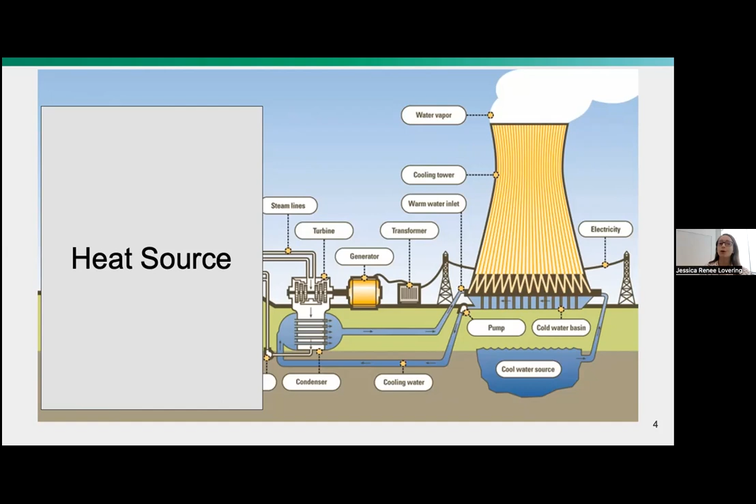Okay, so at the very basic level, nuclear is just another way to boil water. I've put this schematic of a power plant up, and everything you see on the right side could be any sort of thermal power plant. That's what a coal plant looks like. That's what a gas combustion plant looks like. It's also what a nuclear power plant looks like. The only thing that's different is what's on the left, that heat source. That could be your coal boiler or your gas turbine, but for nuclear, it's where the nuclear reactor goes.

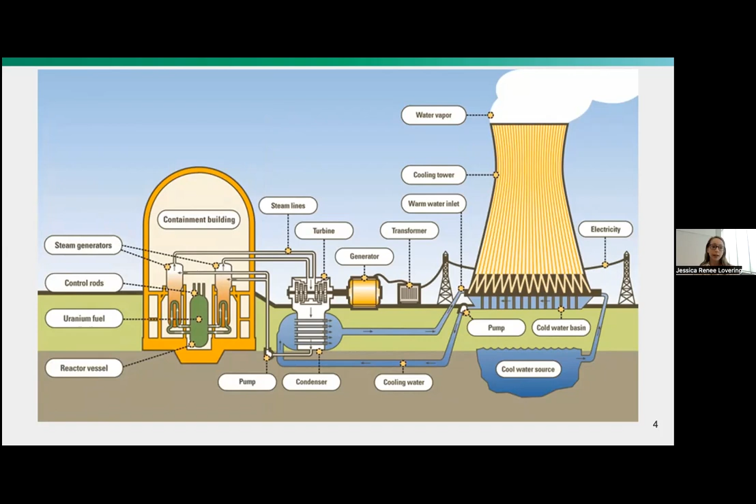And we say colloquially that a nuclear power plant burns uranium for fuel. But that is just a layman's term for what's happening in there. In reality, nuclear fuels, which are usually uranium, don't burn, because what we mean by burn is technically combustion, a chemical reaction where you're breaking molecular bonds. What's happening in a nuclear reaction is fission, which is where the atom splits apart and releases a bunch of energy.

I'm not going to go into the details of that, but the big things why it matters and why it's important that we're not doing combustion is that when you break apart that atom and release all that energy, you have zero emissions, so no CO2, no water vapor coming out like you do with combustion, and you also have extreme fuel density. And so I like this little comic from XKCD that's showing the fuel density of different fuels.

So sugar, coal, fat, gasoline, they're all around in the tens of megajoules per kilogram. And uranium is about 76 million. So many orders of magnitude more dense. And the reason for that is that it's a completely different process for how you're getting energy out of the fuel.

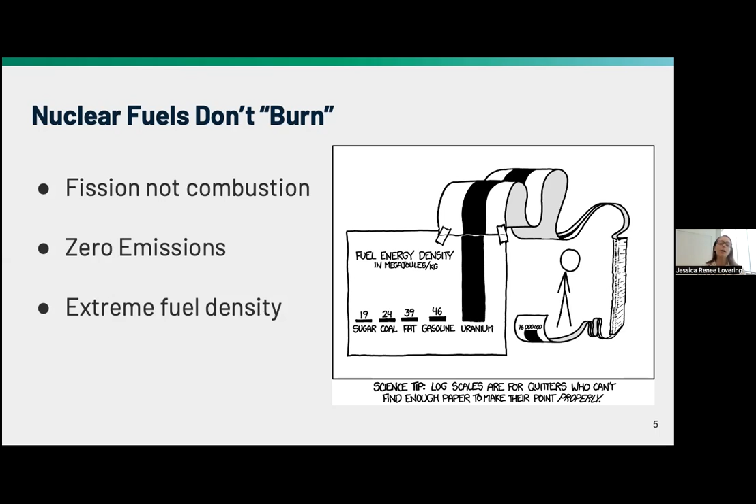And that kind of gives us a little background of why nuclear is so different, even though in the power sector, we think of nuclear, it operates much like any kind of thermal power plant, but it is very different from an environmental perspective.

So one slide on traditional nuclear. The nuclear that operates around the world today, for the most part, generating 20% of electricity in the US, 10% of electricity globally, is what we call light water reactors. And light water is just the scientific name for normal water. About 85% of the reactors around the world today, there's about 500 operating nuclear reactors around the world, are light water reactors. So that's kind of the standard normal.

They're very big, usually over 1,000 megawatts, so over a gigawatt. Most of them are what we call pressurized water reactors, but there's also a set that's boiling water reactors. I'm not going to go into that. The other 15% is what are called heavy water reactors. That's what Canada's entire fleet is, a heavy water reactor, and most of India also uses heavy water. I am not going to go into heavy water at all, but if you're interested, let me know.

The big companies that you've probably heard of, like Westinghouse, General Electric, Areva, Toshiba, Hitachi, Mitsubishi, and even Rosatom in Russia, they all do light water reactors.

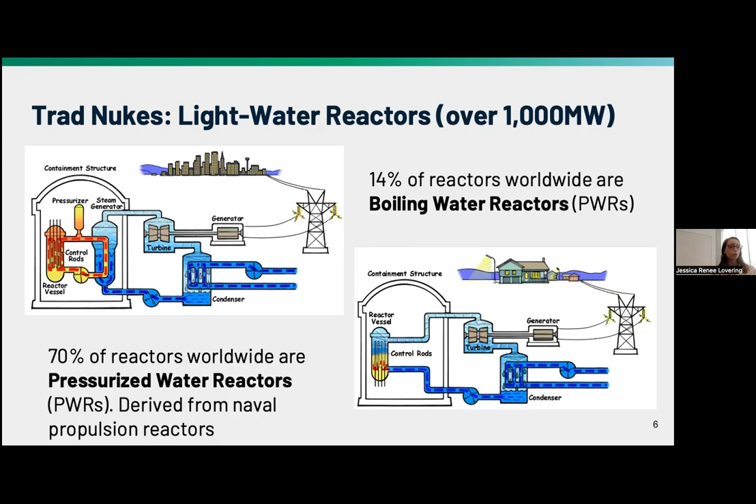There was an oil crisis, and a lot of countries at the time did use oil for electricity generation. So they built out big nuclear fleets to get off oil, and to supply electricity for growing populations. We still had the baby boom in US and Europe, and also heavy industrialization, not just in US and Europe, but also around the world, particularly in East Asia and South Asia.

And then in places like the US, we had more growing concern around air pollution. The Clean Air Act did incentivize some nuclear, more so in Europe than in the US. But those were the main drivers. And nuclear at the time was really seen as sort of the future of electricity production.

Today, some of the drivers are different and some of them are the same. So I think climate change is a much bigger motivator, particularly for young people working in nuclear and working at environmental think tanks and organizations. It's also what's caused a bit of a shift in perceptions of nuclear for environmentally concerned folks.

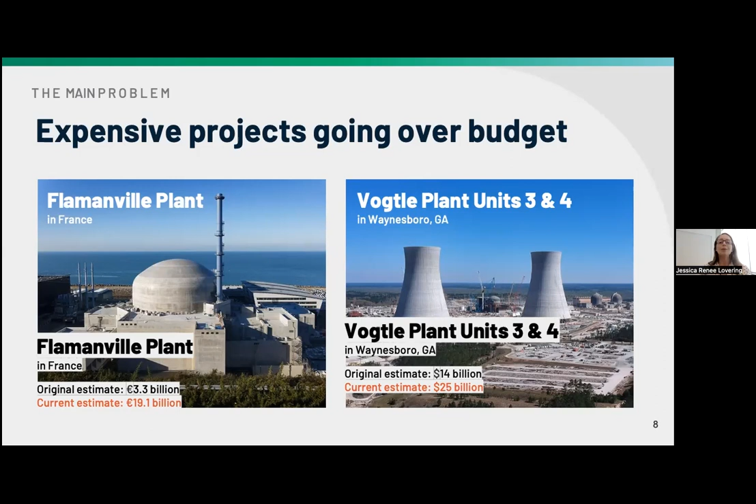I will give this one caveat that even with these huge cost overruns, the electricity coming out of these plants will still be pretty cheap because they're huge. They generate a ton of electricity over 80 to 100 years. But for modern market systems, financing these projects is really tough, and it can bankrupt a utility, especially if it's on the smaller side. So if there is a future for nuclear, it needs to come down in cost. I'm going to talk about how we might make that happen.

But I did want to touch on how cost has become more of an issue, in that the market has also changed. So back when we built out these big fleets of nuclear in the 70s and 80s, mostly we were looking at vertically integrated utilities, often state-owned utilities in Europe and in East Asia. You had huge demand growth, so utilities could justify those investments to their shareholders, in terms of they would get a return on their investment. And oil and gas were pretty expensive, particularly during the oil crisis in the 1970s. We didn't yet have hydraulic fracturing in the US, so natural gas or fossil gas was also quite expensive at the time.

And now, some of these are different, some of these are more so. So now, for the most part in North America and Europe, there's deregulated and liberalized utilities. A lot of emerging economies are also deregulating their utilities. That makes it harder to do big capital intensive projects. But on the flip side, there's a lot more incentives for zero carbon energy now, and you see this in a lot of different forms. But as a counter to nuclear, in the US at least, we have very cheap fossil gas and cheap renewables, which is a good thing, but it's really shifted the attractiveness of nuclear in some cases.

But on the plus side for nuclear, we do have a need for low carbon heat for industry and hydrogen production, and nuclear can provide that. It's one of the only ways you can do it in a low carbon way. So that's a potential new market for nuclear. So this is kind of why there's renewed interest in nuclear, but why it needs to look very different, have different business models, and be much cheaper.

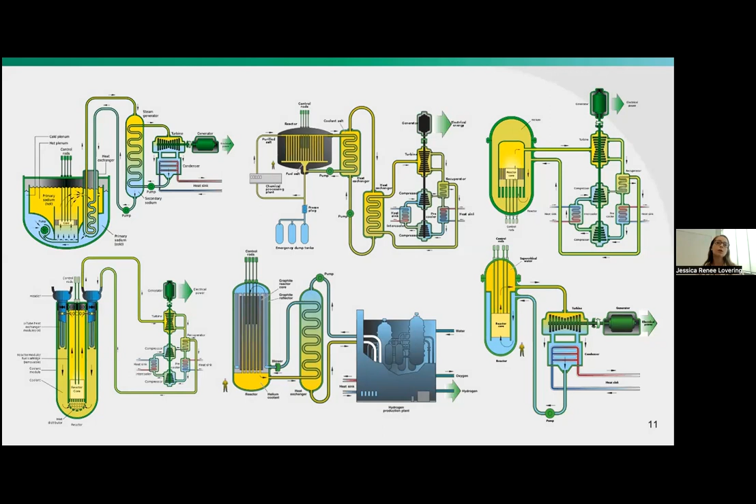And the other big thing that's changed is material science. So we can do a lot of things with materials that we couldn't do back then that make some of these technologies easier. So I'm going to dive into a little bit of what's happening with advanced nuclear today, what the new projects look like, and what the ongoing challenges are. I show this picture, but we're not going to go through all of these. These are kind of the big 6 of advanced nuclear, and I'm not going to go into the technical details. If you want to look up Gen 4 nuclear, these are the 6 Gen 4 nuclear technologies. What I'm going to focus on is what are some of the benefits or attributes of advanced nuclear broadly that make people interested in them.

So big categories. We have small modular reactors. Just a question, who has heard that term before? Okay, so they are what they sound like. For the most part, and this definition really changes depending on who you talk to, they are small, so under 300 megawatts electric. So just to remind you, traditional nuclear that we operate today is usually 1,000 megawatts or higher. Small modular is defined as under 300 megawatts electric, so much smaller.

And then usually it's light water reactor technology. So kind of familiar technology, just scaled down. And then the big thing is modular. So that can be the whole thing is factory fabricated, or major components are factory fabricated and assembled on the site. Depends on the size and the technology.

There's also microreactors, which was a big focus of my doctoral research. Those are defined as anything less than 10 megawatts. So that's really small. They usually are about the size of a shipping container. So just to get your head wrapped around that, they have a lot of other features that I won't go into too much. The one thing that I think is really important is they have lifetime cores. And what that means is they don't do any refueling on site.

So if you were to purchase a microreactor, it would come to you fully fueled and sealed. You would run it for 10 to 30 years. And then when it's spent, you ship the whole thing back and it gets refueled at a central facility. So it's very different than how traditional nuclear operates, which is refueled about every 2 years. And it's a huge process. You shut down the whole plant for a month to do the refueling.

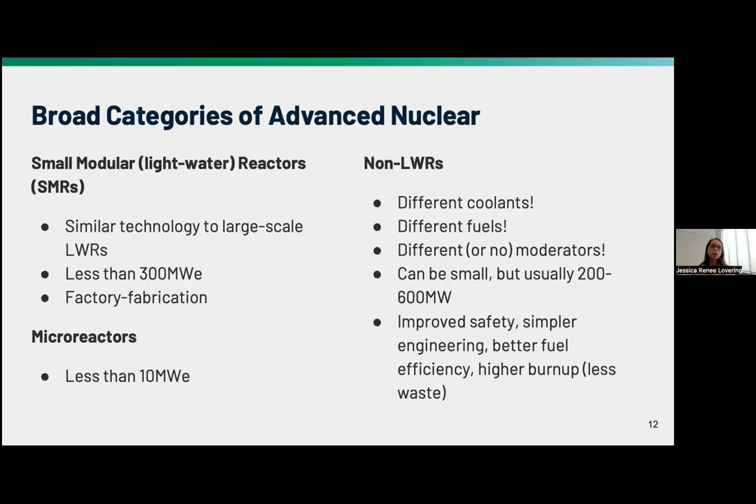They can be small, so you can have a small modular reactor or a microreactor that's not a light water reactor. I'll show you some examples of that. But they don't have to be. So a lot of these designs are in the 200 to 600 megawatts, so more like a gas turbine size. Broadly, all of these non-light water reactors are aiming to solve problems from traditional nuclear, mainly economic problems. So they have improved safety, simpler engineering, that's a big one, better fuel efficiency and higher burnup, which means you have less spent fuel left over at the end. They use up more of that nuclear fuel.

So that's a lot, and there's a lot of different technologies. I'm going to go into a couple of them that I think are farthest along, most interesting. But the one big feature that almost all of these non-light water reactors and almost all advanced nuclear has that's really important is what we call passive safety or intrinsic safety. And what that means, if you're not an engineer, is that the safety is based on physics and physical properties rather than engineered systems. One example of that most people can grasp is a lot of these rely on convective cooling rather than forced cooling with pumps.

And so it's kind of like your pot of hot water on the stove. The hot water rises, and as it cools, it falls back down. So you don't have to have pumps at the bottom pushing that water through constantly. So if something goes wrong with the reactor, the power turns off, it will cool down naturally over time. And you don't have to have all these redundant electrical systems to keep those pumps running in the case of some sort of accident.

The other big one is that most of them use fuels that can't melt. They're either liquid, which is already melted, or they are ceramics based, which means they could melt, but it would sort of need to get to the core of the sun temperature, which is not really feasible in any of these reactor designs. So that's also promising.

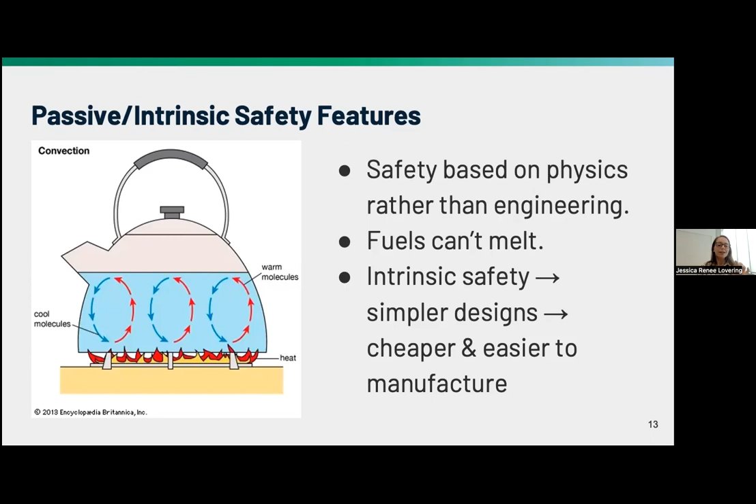And that cheaper and easier to manufacture is key, because that's really the big paradigm shift that's going on with nuclear technologies right now, is a shift from building nuclear as a large infrastructure project, like a hydroelectric dam or a highway system, to something that's manufactured like a commercial product. And I'll give some examples of how this is done.

Now, this is a big if, because we've never built nuclear like this, but this is how every other electricity generating technology is built, basically, except for large coal plants, hydroelectric. But factory fabrication really is the norm everywhere else. So we see that with wind and solar, of course, but also even large combined cycle gas turbines are built in a factory setting.

But because nuclear has much more rigorous safety regulations, the analogy that's maybe a little better, and this is what folks working on the engineering think of more, is wide body aircraft. So these are very large, very complex. They have very strict safety regulations, but they are built on a factory assembly line. And this is a Boeing 787. The list price for that is about 250 to 300 million.

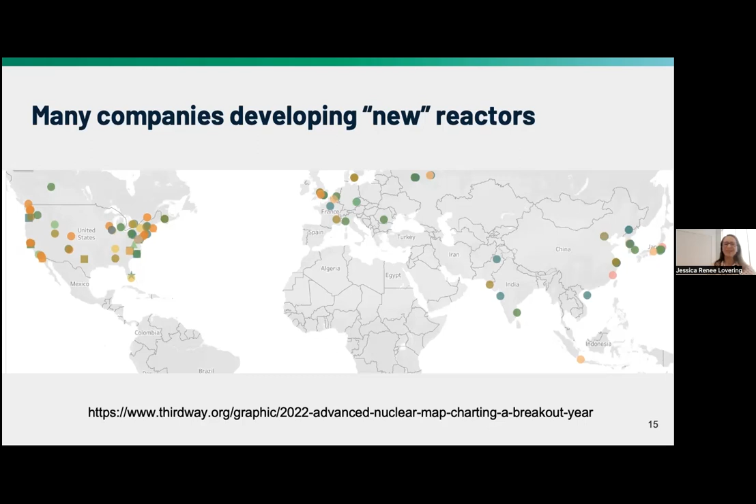Speaking of which, the first one I'm going to touch on is NuScale, which is a light water reactor, small modular reactor, spun out of Oregon State University. I did want to touch on just one little more difference between traditional nuclear and new nuclear. Traditional nuclear, a lot of the companies had military ties for the original designs. They were doing contracts both with the military and with the power sector to develop their technology. With advanced nuclear, you do still see some of those big companies like Westinghouse, GE, but a lot of these companies come out of universities and don't have those same ties. So it's a little bit different. You'll see that. So NuScale came out of Oregon State.

It's a 70 megawatt reactor, so quite small, but they're designed to be built in 6 packs or 12 packs. So when you add that up, it looks more like the size of a traditional nuclear power plant, or really a traditional coal plant, which is what they are aiming to replace. It does have some passive safety features, although it is a pretty familiar technology.

Their first project is planned to be constructed in Idaho, but provide power to a group of municipal utilities in Utah. And they just signed an agreement with Romania to do, I think, a 4-pack of reactors, if I'm not mistaken. It might be a 6-pack, but a big power plant, public-private partnership in Romania.

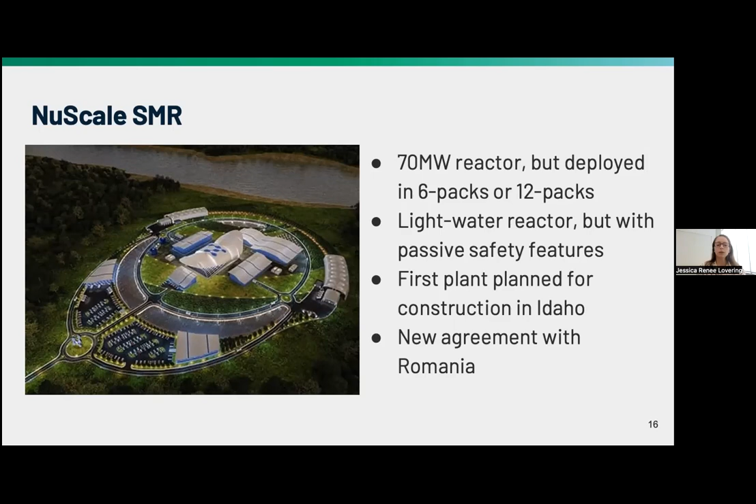Okay, this is maybe also equally far along: TerraPower, their Natrium reactor. They're a joint venture. TerraPower is based in Washington State. They have a joint venture with GE Hitachi, which has a lot of experience manufacturing nuclear. Their design is very different. It's liquid metal cooled. And the interesting thing about the Natrium reactor is that it has integrated energy storage.

So they operate most of the time at about 350 megawatts, but they can provide up to 500 megawatts of peaking power. So they're looking to meet that market need of being able to provide peaking power, which is normally what a natural gas turbine can do on the grid. They use higher enriched fuel, which I did not go into enrichment, but it's kind of like there's more cream in their milk.

And the US doesn't actually produce this fuel. They were going to get it from Russia. They cannot do that anymore. So this is a big challenge that they're grappling with, and actually a lot of the advanced reactor companies are grappling with. I'll show you some legislation that's gone through. Many pieces of legislation and many discussions in Congress right now are all about HALEU, which is the term for this higher enriched fuel, high assay, low enriched uranium.

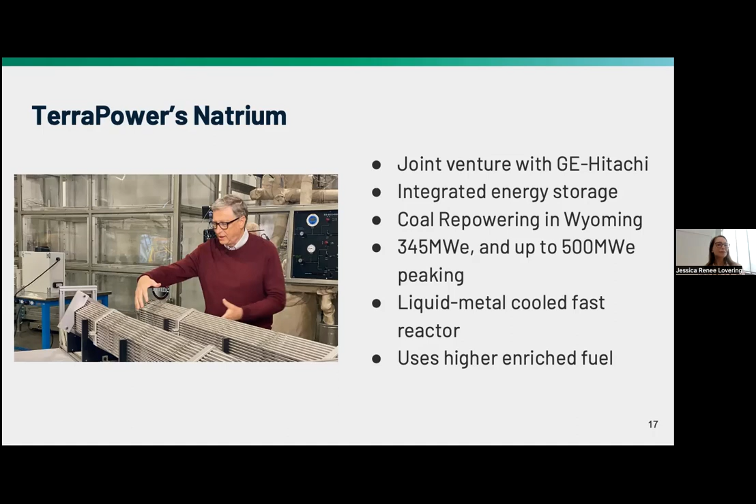Oklo is a company that's actually based in Mountain View, California. Their Aurora microreactor is 1.5 megawatts, so that's tiny. That's less than a typical wind turbine in terms of power output. They have a lifetime core, so they operate, I think, 25 years between refuelings. Fits in 2 shipping containers, and they don't use any water to cool their reactor or generate electricity. So it could be good for arid regions. And it's built below grade, which is underground, basically.

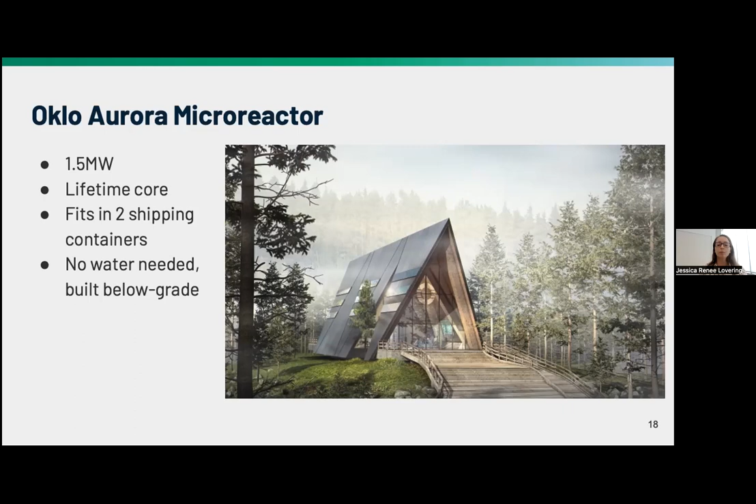They're also trying to make very aesthetically pleasing buildings, as you can see. But it's a very different model, very simplified design. They don't have moving parts in their reactor core. And they're aiming to build their first commercial demonstration before 2027, also in Idaho.

But just last week, they announced that they have a new contract signed for a project in Piketon, Ohio, for a larger reactor, a 15 megawatt reactor that they're going to build 2 of to power a port in Ohio. And that's what it looks like. But if you want to learn more, look up Oklo, Ohio. It just came out, so I don't know too much more details of that. But they're looking at building or licensing a couple different size designs.

Just a couple more to touch on. I'm not going to read through all these details. Kairos, spun out of UC Berkeley. Their focus is on taking a lot of different proven technologies from the power sector, from other industries, and putting them together. It's a salt-cooled pebble fuel that uses a combined cycle gas turbine for generating electricity. Not the gas part, they're using the heat from the nuclear reactor to spin that turbine. Their first demonstration is going to be in Tennessee, and it's 145 megawatts.

And then X Energy, they have a couple different size designs. They're also looking at building in packs. So their main design is 80 megawatts that they build in a 4-pack. It's a gas-cooled reactor, also uses pebble fuel. I didn't explain what that means, but it's there.

And their first demonstration that they just announced a few months ago is actually with Dow Chemical for an industrial site in Texas on the Gulf Coast. So they are not going to be partnering with a traditional utility for their project. They are going to use the electricity on site, but they're also going to use a lot of the process heat for chemical processes at that Dow site.